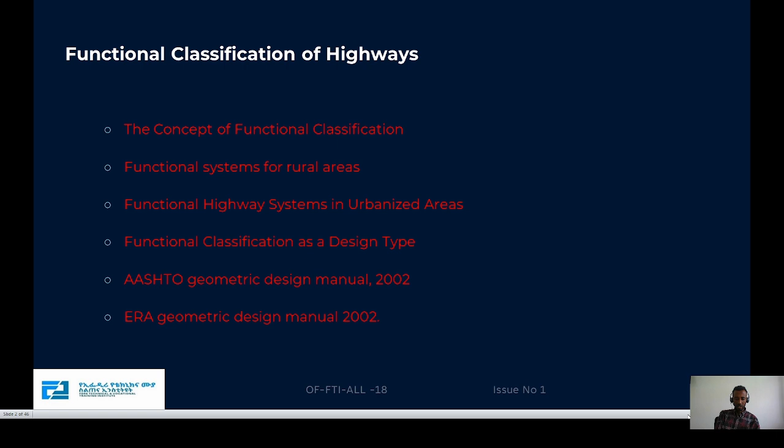I am here to present the fifth video lecture from chapter 2, which deals with the functional classification of the highway. In this chapter, the following topics will be included: the concept of functional classification, the functional systems for rural and urban areas, how functional classification is used for the design type of highway, and lastly the geometric design manuals, AASHTO as well as the ERA manual, Ethiopia Road Authority manual.

So first we will deal with the concepts of functional classification. The function of the highway is to provide a facility as well as access that allows the movement of vehicles. Different types of facility are needed for various vehicle traveling movements. To differentiate between types of highway, the functional classification has been developed.

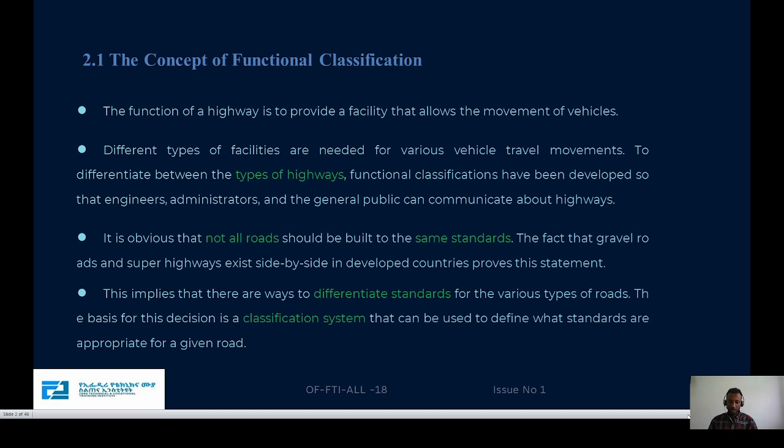As you know, all roads should not be built to the same standard. For example, there are different types of roads, from the gravel road up to the super highway, and these do not have the same standard. This differentiates the standards for various types of roads. So the decision of what standards are appropriate to a given road comes from the functional classification system, for example for a gravel road versus a super highway.

Roads have different multi-purposes, as through routes for long distance traffic. For example, a trunk road moving from Ethiopia to Kenya, or Ethiopia to Djibouti, travels a long distance. Roads are also used for local routes between towns in Ethiopia, such as Addis Ababa to Bahir Dar, Addis Ababa to Mekelle, or Addis Ababa to Awasa.

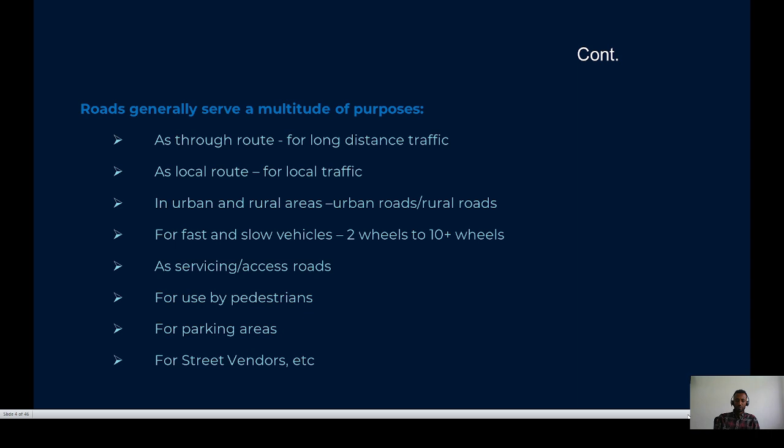Roads are used for local purposes, for urban and rural areas, and for fast and slow vehicles. They also serve as access roads for moving to residential areas, factories, and agricultural areas, giving access for pedestrians, parking areas, and even street vendors. So roads have multiple, different purposes.

This gives the rationale for functional classification. There is a mix of uses: vehicles, pedestrians, bicycles, motorcycles, and other users share the roads. This results in reduced safety, efficiency, and capacity. Therefore, roads are classified according to their respective functions.

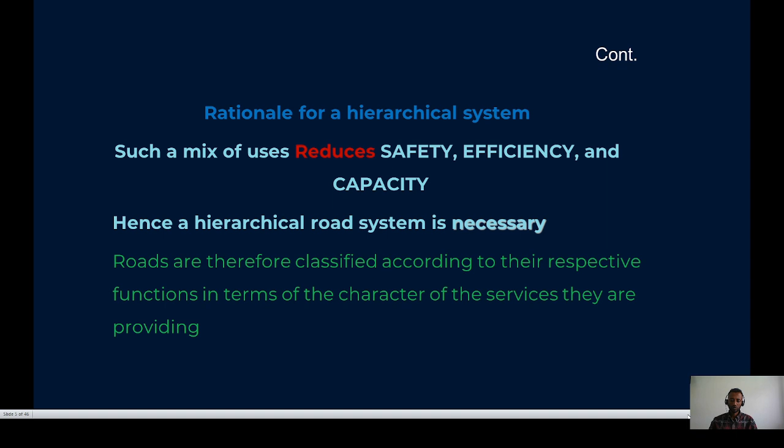The road can be for through movement; for example, in the Ethiopia Road Authority manual this is called a trunk road. When moving between towns, it is called a link road. So roads are classified by their function.

The objectives set for functional classification are: first, to obtain the best use of the existing network—bicycles use the bicycle lane, motorcycles and pedestrians also use their access, so this is the best use of the existing network. Second, each type of traffic uses the most appropriate route—bicycles use bicycle facilities, vehicles use vehicle routes. Third, minimizing risk to users in the built environment, to ensure better management, maintenance, and design policies, so that funding for roads is targeted appropriately.

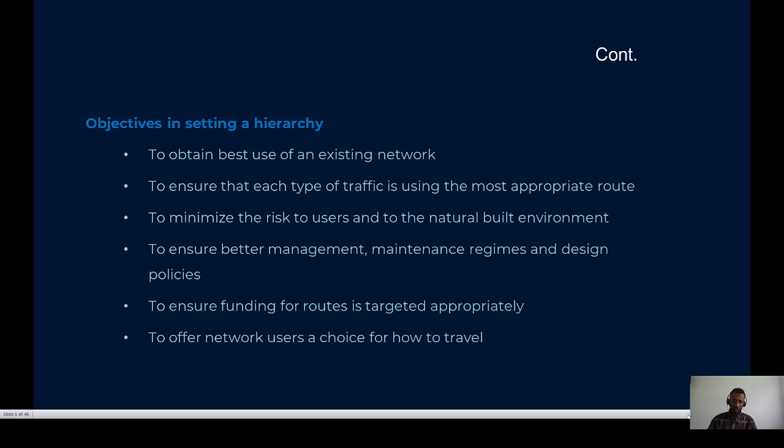For the quality of trunk roads, large or heavy vehicles are used, for example from Ethiopia to Kenya or Djibouti. This route carries a large movement of tonnage of freight or goods, so it requires high funding, to offer network users a choice of how to travel. This relates to the hierarchy of movements.

We have the main movement, which is the trunk road. These trunk roads connect countries, such as Ethiopia with Kenya or Ethiopia with Djibouti. On this level the standard is very high and the speed is also increased.

Then there is a transition, or collector level. A collector would be, for example, from Addis Ababa to Bahir Dar or Mekelle—this is a transition. Then there is the distribution level, distributing from a rural area such as Bahir Dar or Mekelle.

This acts as a collector, and the other level is terminal access to the woredas, villages, or residential areas. So moving from the main stream to the access stream, the standard decreases, the speed decreases, and the volume of traffic also decreases.

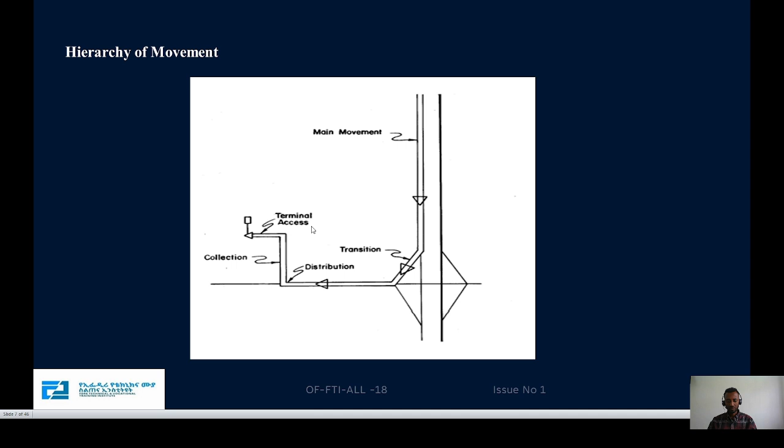Now, the functional systems for rural areas. Rural area roads consist of facilities outside of urban areas. The recognized systems for rural areas are classified into four: the first is principal arterial roads, minor arterial roads, major and minor collector roads, and local roads.

Going down from the principal arterial to the local roads, the standard decreases, the speed decreases, and the traffic also decreases. So the highest quality of standard is provided for the first one, the principal arterial.

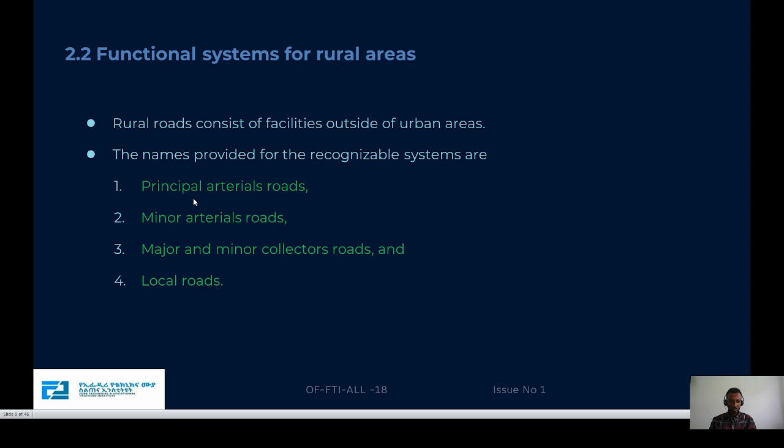So we have deals each of them. Rural principal arterial systems consist of a network of routes with the following service characteristics.

There are mainly three main characteristics: corridor movements with trip lengths, long lengths, and density - a large density of vehicles suitable for substantial statewide or interstate travel, moving longer distances or connecting between interstates.

Movements between virtually all urban areas with a population of over 50,000, and also large majorities of population over 25,000. This is integrated movement without stub connections.

This means except if there is unusual geographical or traffic flow conditions, there is no access. It involves traveling across international boundaries, for example Ethiopia to Djibouti, Ethiopia to Kenya.

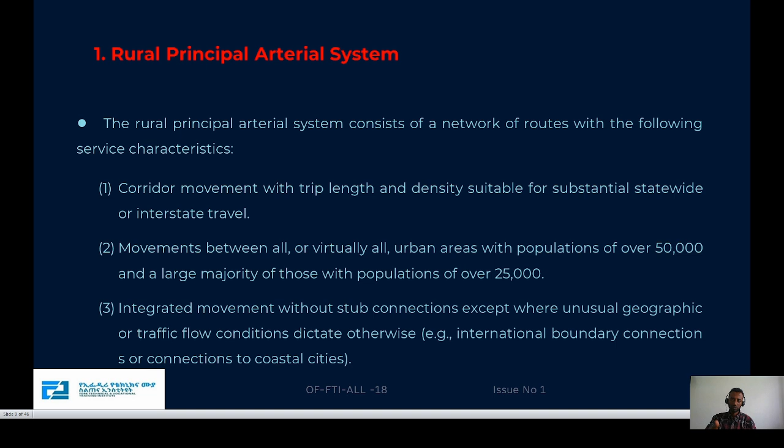So there is no access for residential or different purposes in the most dense population areas. This principal arterial system is heavy travel routes used for heavy vehicles.

This includes most existing rural freeways. Freeways will also be included in principal arterials. The principal arterial systems will be classified into design types: freeway and other principal.

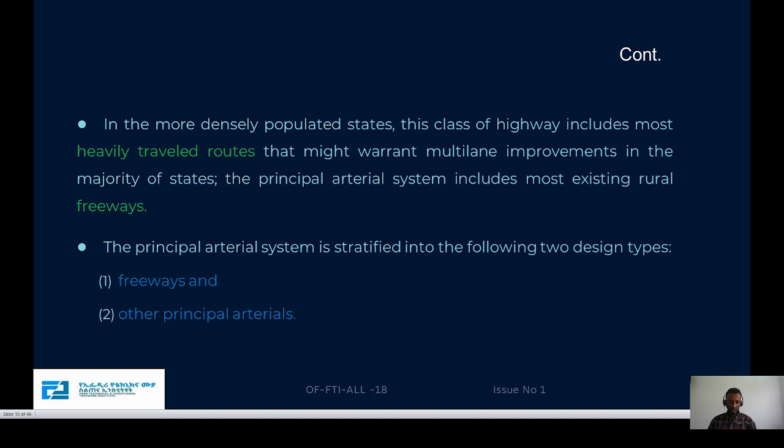Next to principal, there is the rural minor arterial system. This rural minor arterial road system works in conjunction with the rural principal arterial system, forming a network of conjunctions.

The first characteristic is links of cities, large towns, and other traffic generators connected with rural minors, integrating interstate and inter-county services.

For example, this would be provided from Addis Ababa to Mekelle, Awassa, etc., where interstate towns are connected.

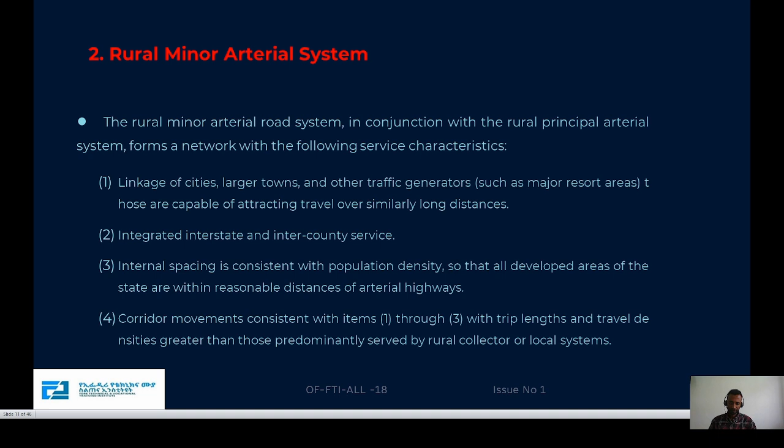Internal spacing is consistent with the population density, determined by the population density. The corridor movement is consistent with items 1 through 3, and we have the third part: rural collector systems.

These collector systems: first is the principal, which deals with international boundaries, then coming to the minor, which deals with the towns, and collectors are the smallest.

Collectors give access to intra-county connections or give traffic volume for the small arterial system. The distances are short relative to the arterial routes.

It is principal as well as minor. Consequently, there are more moderate speeds relative to the arterial systems - speeds will decrease.

Rural collectors, more clearly, this system is classified into two: major collector roads and minor collector roads. The major collector roads serve county seats not on arterial routes - large towns not directly served by the higher systems, meaning the principals as well as the minor.

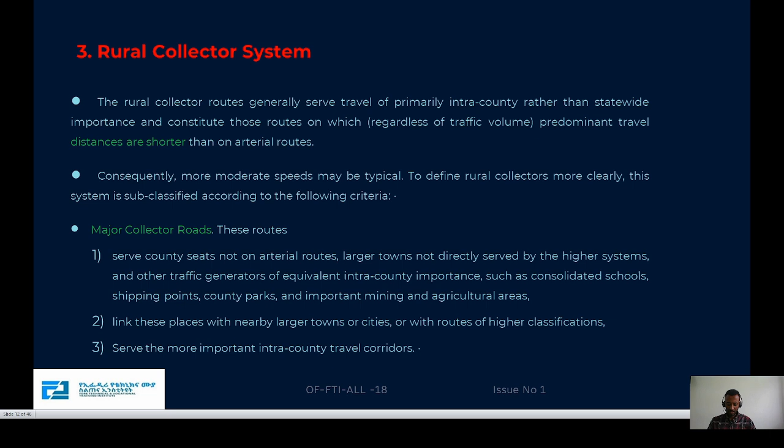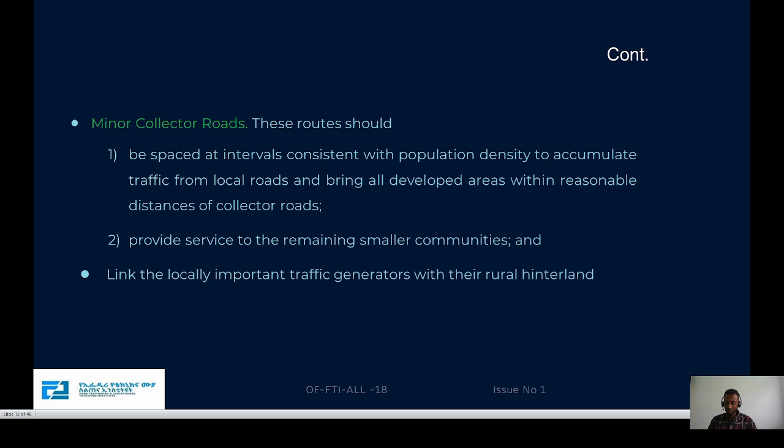Minor collectors are spaced at intervals consistent with population density, and provide service to the remaining small communities, providing connections between the local roads and the minor arterials.

Lastly, there are relatively short distances as well as decreased standards. These are rural local systems.

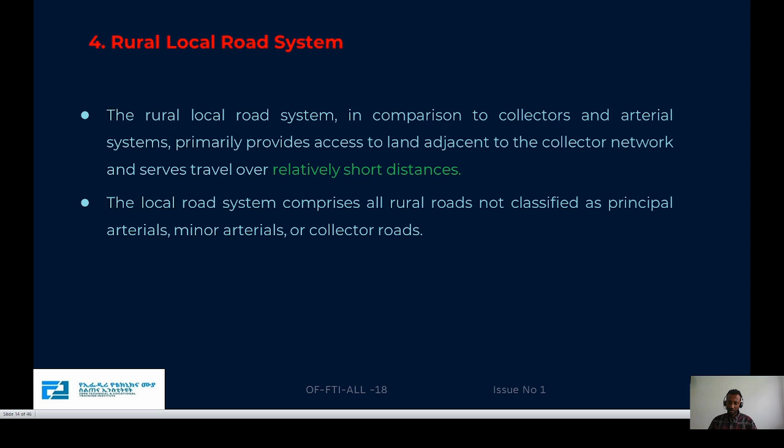This local system provides traffic to the collector roads, and also extends urban systems.

The functional classification of roads is primarily based on qualitative rather than quantitative terms. These qualitative terms vary with geographic conditions, population density, spacing between and size of cities, and density and patterns of the road network. It is very important.

Also important are the trip lengths and traffic volume. Route spacing does not apply to all systems in all states.

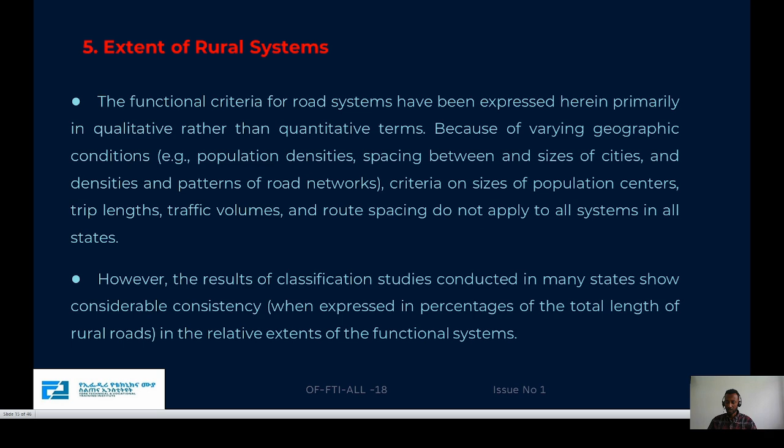The speed is also small, the standard is small, but the percentage of total length is very high - for example, providing access to every residential or agricultural area.

So local road systems provide 65 up to 75% of the total length. The principal arterials are about 2 up to 4%, and the collector roads are 20-25%.

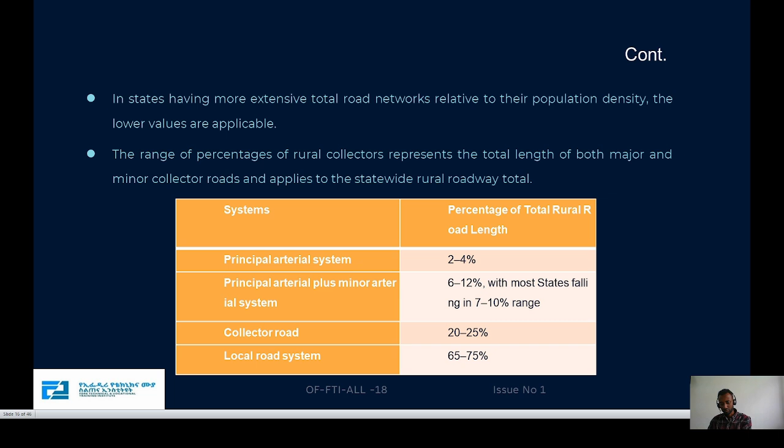So we have the major percentage of length that will be the local road, which is very important. The functional highway systems in urbanized areas: like rural areas, urban will be classified into four: urban principal arterial streets, minor arterial streets, collector, and then local streets.

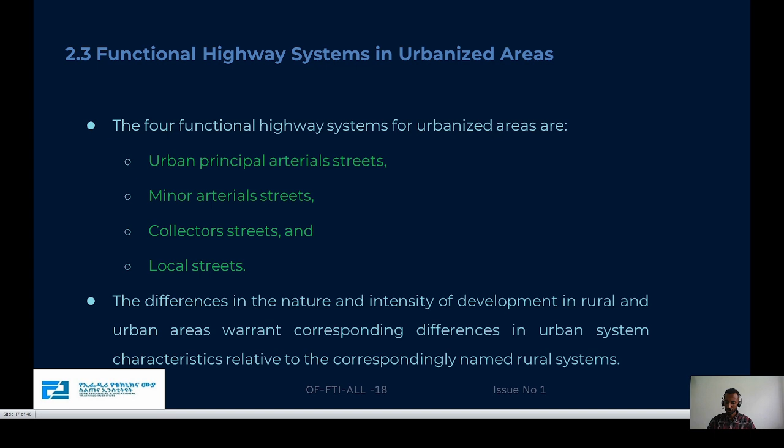This differentiates the nature and intensity of development in rural and urban areas, warranting a difference in urban systems characterized relative to the accordingly named rural system. So the first, urban principal: in every urban environment one system of streets and highways can be identified as unusually significant.

So this urban principal arterial system will provide for population under 50,000. It is limited in number and extent. It primarily provides service, not access. It is for providing service or movement mobility.

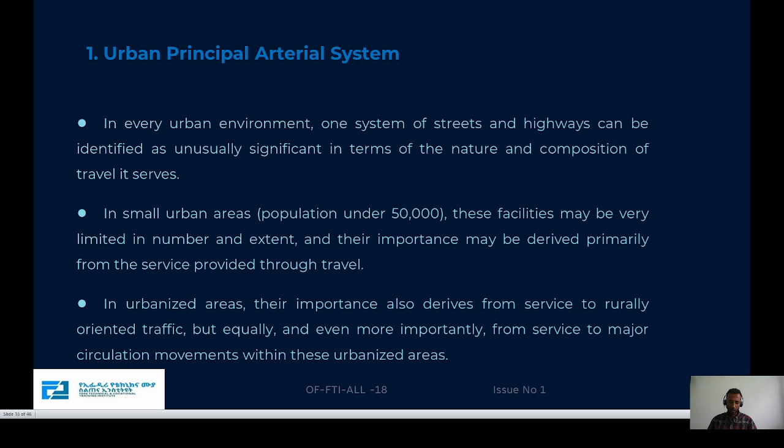The urban principal arterial systems are the major centers of activity in urbanized areas. Mostly we use it for high traffic volume. The length is for the longest desirable trips, and it carries mobility for high populations of urban areas.

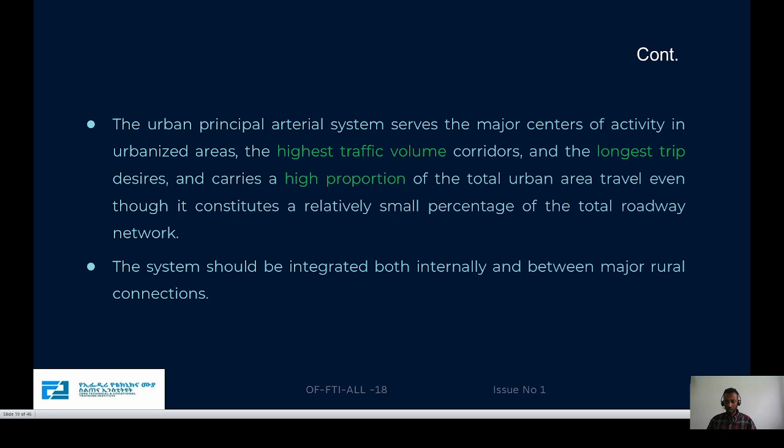This also covers a small percentage, for example in rural areas up to 4%, so there is a small percentage covered in road network or length. This principal also carries most of the trips entering and leaving urban areas. It is the major roads or high volume of traffic, so this is for bypassing.

In addition, significant intra-area travel, such as between central business districts and outlying residential areas, between major inner city communities, between major suburban centers, is served by this class of facilities. This principal in urbanized areas also provides continuity for all rural arterials that intercept the urban boundaries.

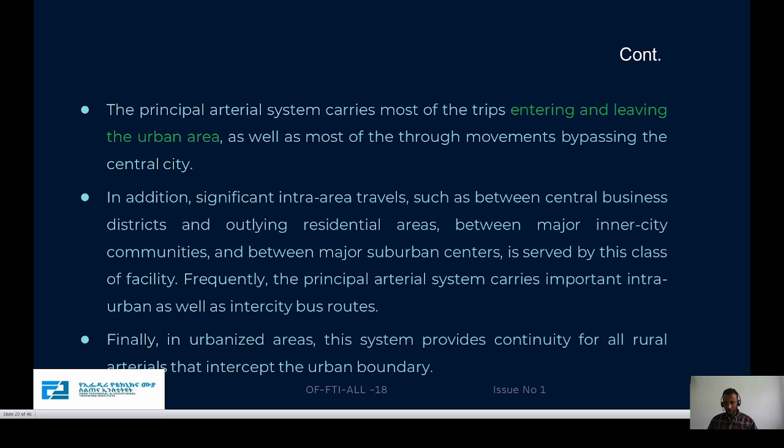So it is connecting with rural arterials for entering and leaving urban areas. These principal arterial systems are mostly fully or partially controlled access facilities, so mostly not restricted to control access routes.

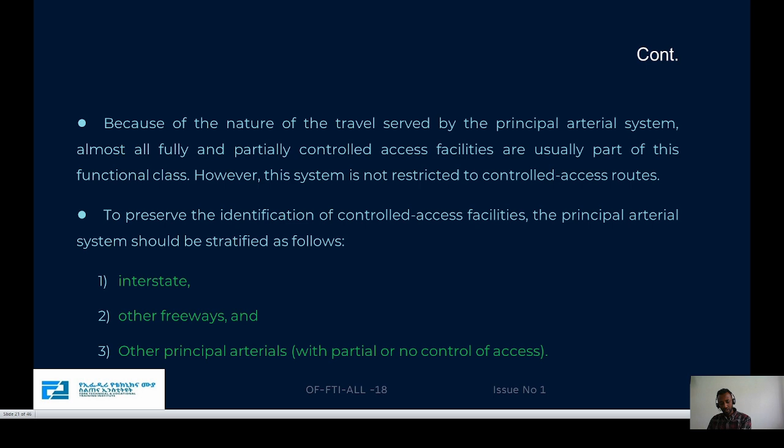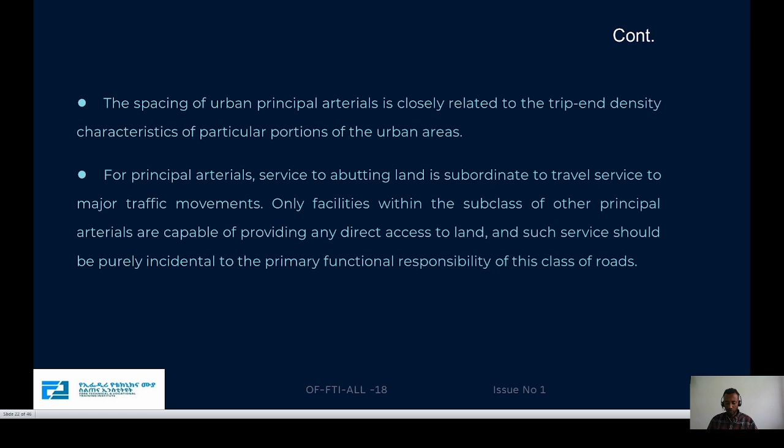It provides access through different interstates, freeways, and other principal arterials. The spacing of urban principal arterials is closely related to the trip-end density characteristics of particular portions of urban areas. Also, the principal arterial's abutting lands have no access, or it is partial access.

The second is the minor arterial street system. This minor arterial system interconnects the urban principal arterials with the collector. It accommodates trips of more moderate length. The length goes down toward local: shorter lengths, but for minor arterial it's a moderate, lower level of travel mobility relative to the principal.

The level of travel mobility going down toward local is lower. The minor arterial street system is not classified as principal, and land access is more emphasized for it, along with lower traffic mobility. Going to the fourth type, locals, there is provided more access.

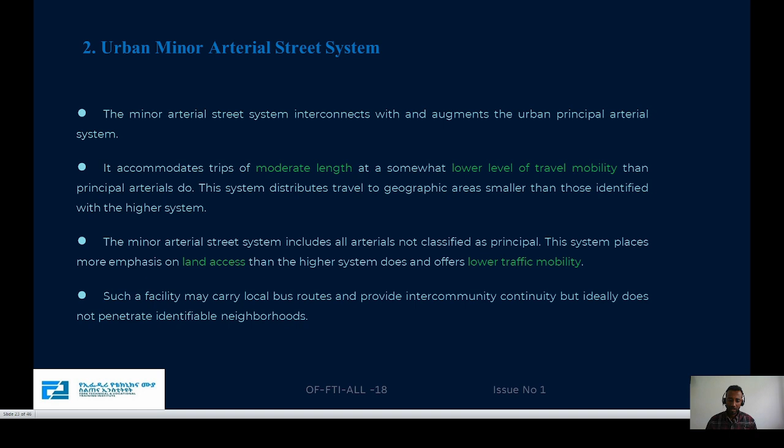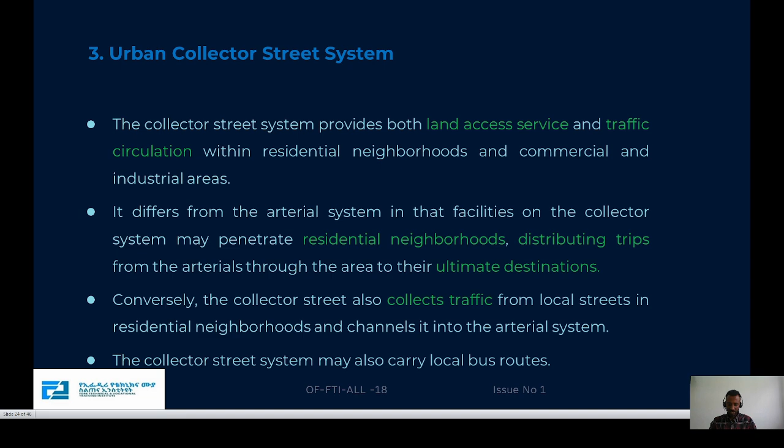It collects traffic from the local streets and provides it to the arterial systems, acting between arterial and local. So the collector collects traffic from local streets and provides it to arterial systems. Collector systems also carry local bus routes.

Lastly is the local street system. This local street system mostly permits direct access to abutting, direct access to residential areas, with connection to a higher order system or the collector, and a low level of mobility. It provides mostly for access, with no bus routes.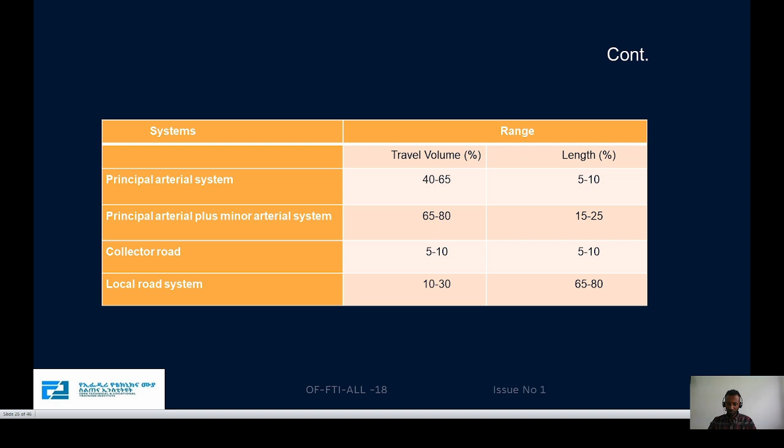Also the travel volume: principals will have high traffic volume, mostly heavy vehicles, and local road systems mostly have light traffic volumes, with the percentage also decreasing, 10 to 30 percent.

Thank you for listening to my presentation. In the next video we will deal with functional classification as a design type.